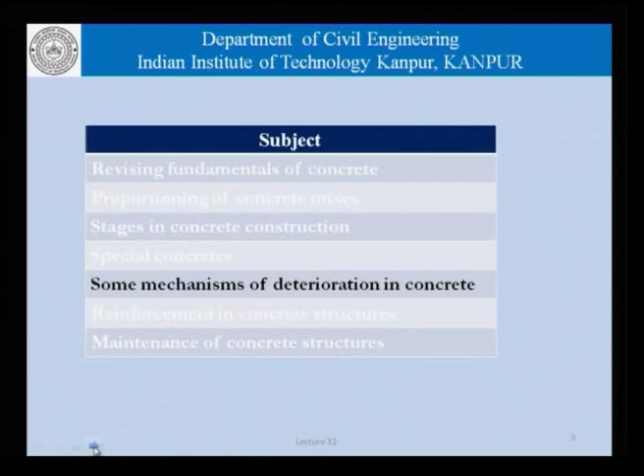Namaskar and welcome to another lecture in our module of Concrete Engineering and Technology, where we are talking about different aspects of concrete, beginning with the fundamentals, proportioning of mixes, stages in construction, special concretes, deterioration, reinforcement and maintenance. And when we talked about some of the mechanisms of deterioration in concrete, we have talked about corrosion of reinforcement and alkali aggregate reaction, including a brief treatment of the mechanisms involved, preventive methods, implications and so on and so forth.

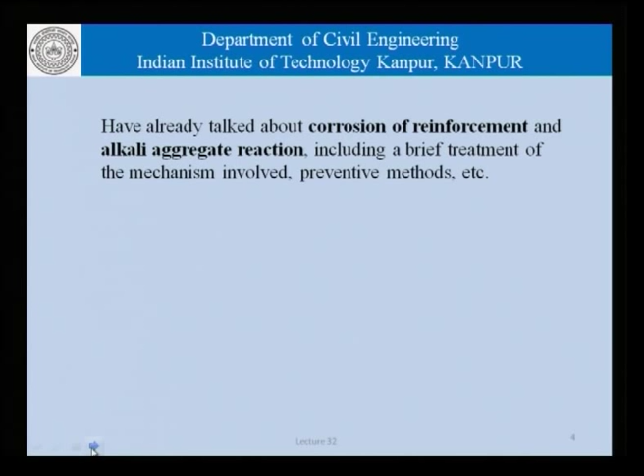In our discussion today, we will be talking about two other mechanisms, carbonation and the deterioration of concrete on account of cyclic freezing and thawing. We had mentioned carbonation in passing when we were talking about reinforcement corrosion in reinforced concrete structures. Following the discussion on carbonation and freezing and thawing, we will also talk a little bit about the concept of durability design, and that is something which is listed here as futuristic.

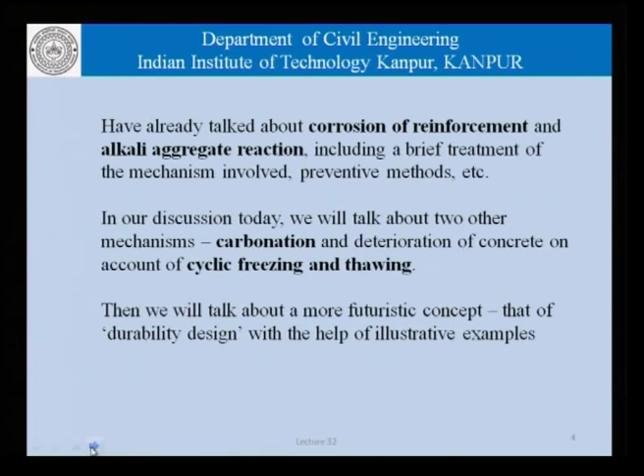Basically, it means that we do not do that kind of durability design in our structural design, or durability design in that sense is not a part of the normal design process that we go through when we design structures today. So, this is something which we would possibly live to see in the future, and that is something which we will talk about at the end with the help of illustrative examples. Now, beginning our discussion today with the carbonation of concrete.

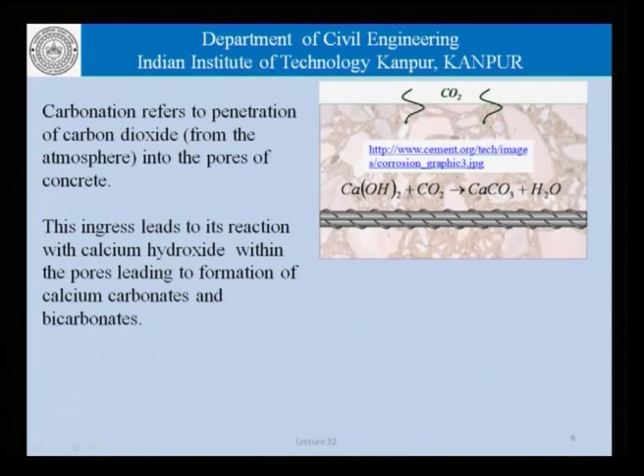Basically, concrete structures exposed to the atmosphere are exposed to a certain amount of carbon dioxide, and this carbon dioxide can penetrate into concrete through the pores which are there in concrete. And these pores and pore spaces, the kind of volume of pores, all those ideas have been talked about earlier. And we know that on account of hydration, a lot of calcium hydroxide is available in the pore spaces. Now, as far as carbonation is concerned, all concrete structures in the atmosphere are exposed to a certain amount of carbon dioxide which is present in the atmosphere. This carbon dioxide can obviously permeate into the concrete through the pore spaces which are there on account of the normal porosity, the genesis of which is arising out of movement of water which is left behind after hydration and so on.

So, carbonation basically refers to the penetration of carbon dioxide from the atmosphere into the pores of concrete, and this ingress leads to its reaction, that is the reaction of carbon dioxide with the calcium hydroxide within the pores, leading to formation of calcium carbonates and bicarbonates. So, we know that there is a lot of calcium hydroxide sitting in the pore spaces as a result of the hydration reactions. We know that all the silicates in cement, when they hydrate, give rise to calcium hydroxide, and this calcium hydroxide is the reason for having a very high pH of pore solution within concrete. Now, the penetration of carbon dioxide from the atmosphere into the concrete leads to this reaction here, which shows calcium carbonates are formed, and if this continues, we also get calcium bicarbonates being formed. So, basically carbonation is the process by which calcium hydroxide within the pore solution is converted to calcium carbonates and bicarbonates as a result of the reaction of calcium hydroxide with the carbon dioxide.

So, in principle, what happens as a result of the carbon dioxide ingress is the consumption of calcium hydroxide and the consequent reduction in pH of the pore solution. So, this calcium hydroxide is responsible for the very high pH, which is in excess of about say 12 or 13 in the pore solution. Now, naturally, if calcium hydroxide gets consumed and converted into calcium carbonates or bicarbonates, the pH of the pore solution will go down. So, this reduction in the pH has its own implications as far as the durability is concerned, as we shall see shortly. And we have the second part of it, which is deposition of calcium carbonate in the pores. So, this deposition of calcium carbonate in the pores has its own implications in terms of the properties of the concrete.

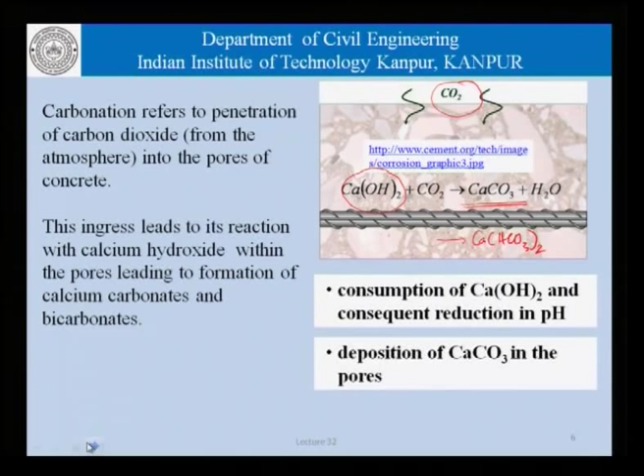Now, once we have that, here is a representation of what really goes on as a result of the carbonation in concrete. So, we have a zone here which is the closest to the atmosphere. So, here is the atmosphere. We have this region here which is the cover concrete, and we have this steel bar here. Now, as carbon dioxide penetrates into the concrete and reacts with the calcium hydroxide within, we can imagine or think that there is this region here where, let us say, a large amount of calcium hydroxide has been converted to calcium carbonates.

So, in this portion here, we can say that we have very little calcium hydroxide left, and we have a reasonably large reduction in the pH. In contrast, we have a region here which is still largely unaffected by the penetration of carbon dioxide from the atmosphere, and we have a lot of calcium hydroxide still sitting here, and the pH is still in excess of, let us say, 12 or 13 or whatever it is.

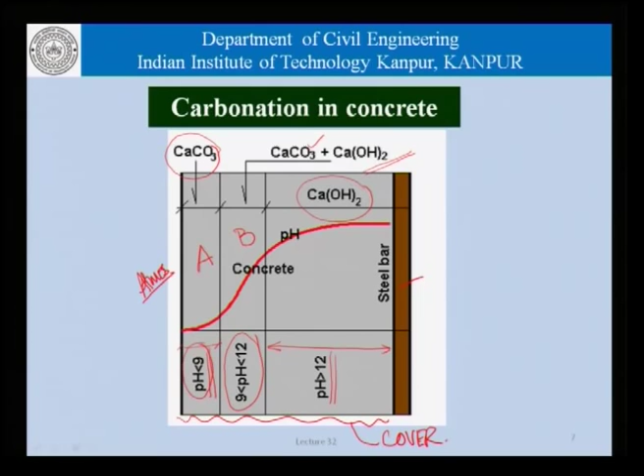So, we are trying to divide the cover concrete into a zone A, B and C, where zone A is a zone where most of the calcium hydroxide has been consumed and a lot of calcium carbonate has been deposited. Zone C is largely unaffected, and therefore, there is practically no calcium carbonate there, it is all calcium hydroxide, and zone B is still in the transition where some calcium carbonate is there and there is still some calcium hydroxide. So, with this model understanding, let us try to see how the carbonation is measured in concrete.

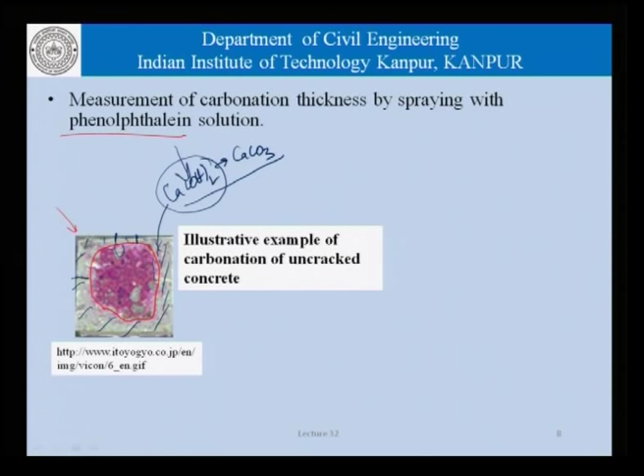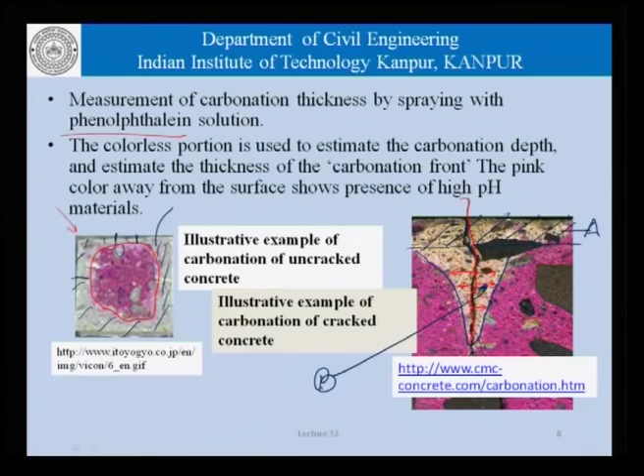This here is an example of carbonation as will occur in cracked concrete. What is being seen here is that in addition to the carbonation which has taken place in this part, which is let us say A, which is similar to this kind of an area where carbon dioxide has generally penetrated into the cover concrete. In addition to this, carbonation has also spread in this portion, let us say call it B, because carbon dioxide has gone through this crack and spread into concrete through the crack, causing the calcium hydroxide in the neighborhood of cracks also to be consumed.

And in such cases, of course, a definition of carbonation depth becomes a lot more complicated. But to deal with these complications is part of our engineering exercise, and once we understand the processes, then it is only a matter of making the right kind of approximations, the right kind of models, and making engineering decisions.

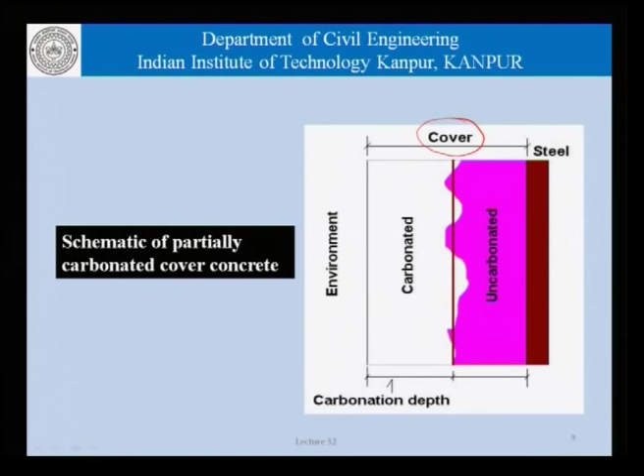In this case, we are only saying that let us not talk about the partially carbonated depth, let us talk in terms of a carbonated zone and an uncarbonated zone. The carbonated zone would appear to be white if we are testing it with a phenolphthalein kind of a spray, and the uncarbonated zone will be pink.

Now, this front here has been purposely shown to be not necessarily straight, and that is what we will see in actual practice most of the time if we carry out any phenolphthalein spray from a core or any structure that we visit. This depth here, how we define this depth is a different matter, whether we take it to be the maximum here, the minimum here, or some kind of an average, whatever it is.

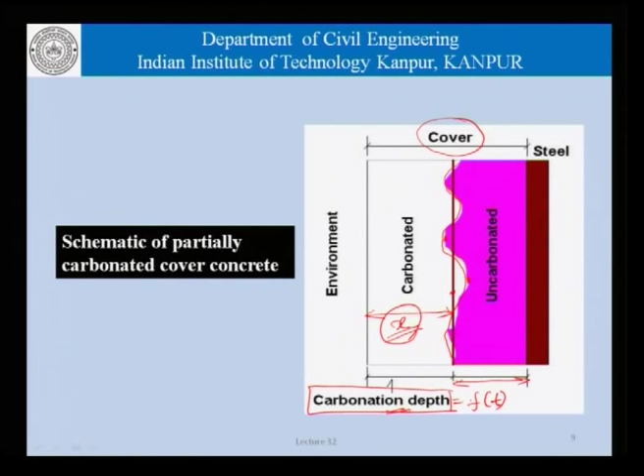Now, this irregular nature of the carbonation front notwithstanding, if we were to draw a straight line as is shown here, then this depth, if it has a value of x, notwithstanding how we measure the x, whether we take it to be the maximum value or the minimum value or the average value, whatever we do, this x is sometimes called the carbonation depth. And naturally, this carbonation depth is a function of time. As more and more time goes by, the carbonation depth increases, and that is something which we need to keep at the back of our mind when we are talking about carbonation in concrete.

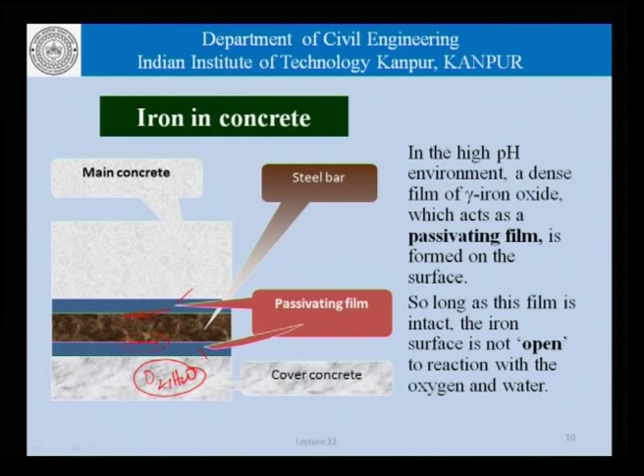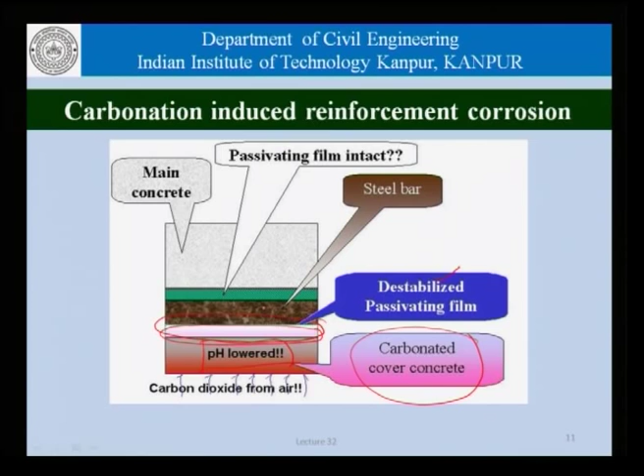So, as far as a carbonated concrete is concerned, what really happens is that once the concrete becomes carbonated as shown here, the pH in the cover concrete is lowered, and therefore, the passivating film in this part is destabilized, and therefore, it is as good as not existing, and that renders this surface of the reinforcement susceptible to corrosion.

So, as far as addressing the problem of carbonation in reinforced concrete structures from the point of view of durability and reinforcement corrosion, it can be said that carbonation leads to corrosion by the form that, on account of the penetration of carbon dioxide into the concrete, the calcium hydroxide is consumed. This lowers the pH, and if the pH falls below, let us say 9 or 10, the passivating film that is stable otherwise becomes thermodynamically unstable, and that means that the surface of the reinforcement becomes vulnerable to corrosion on account of the presence of oxygen and water in the cover concrete.

So, the presence of oxygen and water in cover concrete is never in question. It is only that the presence of the passivating film that prevents a physical contact between the reinforcing surface and the oxygen and water, that prevents corrosion in normal concrete, but once that film is destabilized, the surface is vulnerable to attack.

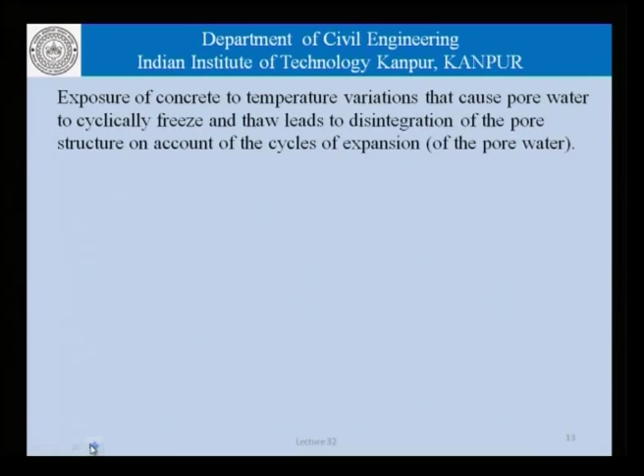So, with this overview of the carbonation process and its ensuing implication in terms of reinforcement corrosion, let us briefly talk about cyclic freezing and thawing in concrete. Now, exposure of concrete to temperature variations that cause pore water to cyclically freeze and thaw leads to disintegration of the pore structure on account of the cycles of expansion of pore water. We know that when the water freezes at 0 degrees centigrade, it expands, and therefore, if the concrete is saturated with water and the temperature of the atmosphere becomes such that the pore water freezes, it will obviously cause some kind of expansive stresses in the surrounding pore structure.

And if this happens cyclically, that is, the water freezes and then as the temperature in the atmosphere rises over a period of time, it thaws and freezes once again, and that is what is cyclic freezing and thawing. If that happens repeatedly over a period of time, then the pore structure actually disintegrates, and this disintegration of the pore structure is what we are talking about when we are talking about the problem of freezing and thawing in concrete.

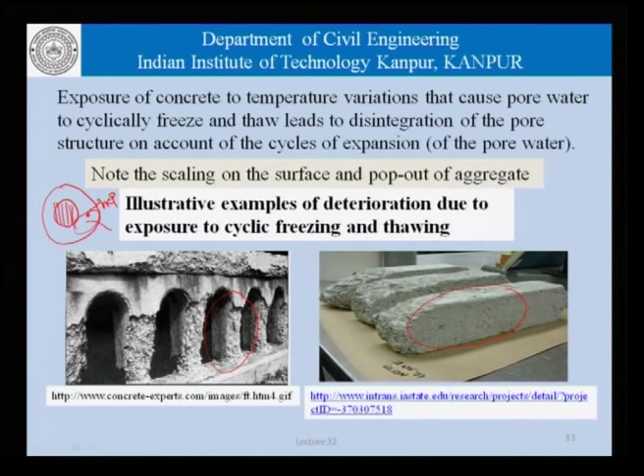What really happens is that if we have an aggregate sitting inside hardened cement paste, on account of cyclic freezing and thawing, it is the pore structure of HCP that disintegrates. The aggregate itself is not so vulnerable, even though it has its own porosity, but it is the HCP which is more vulnerable. Now, on account of repeated cycles of freezing and thawing, the HCP disintegrates. If the HCP around the aggregate disintegrates and gets removed, then the aggregates become unlocked from their matrix and we have a pop out of aggregates.

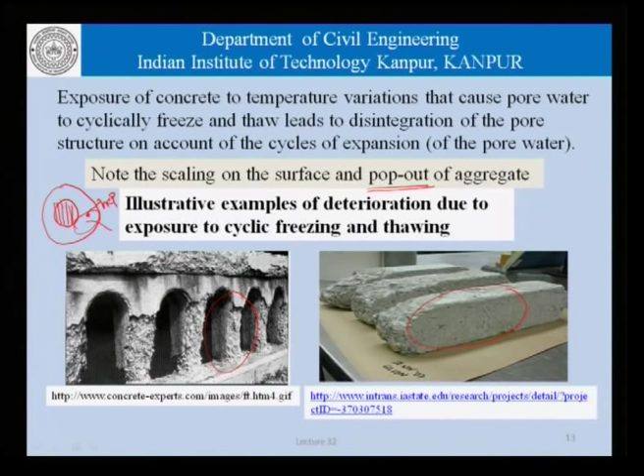So one of the things that happens as far as freezing and thawing of concrete is concerned is scaling, pop out, and a general disintegration of the surface layers.

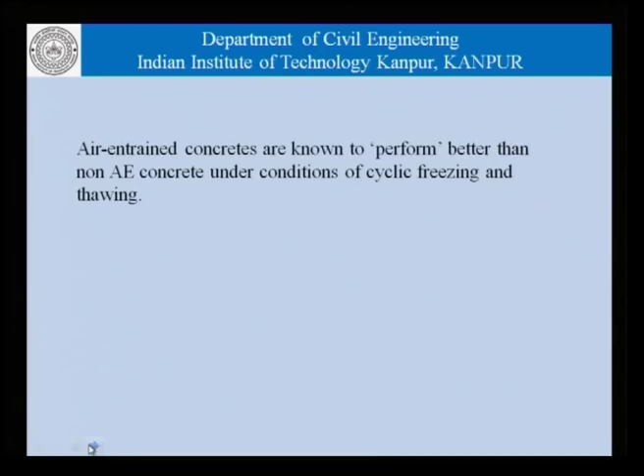Now, air entrained concretes are known to perform better than non-air entrained concretes under conditions of cyclic freezing and thawing, and this is something we have talked about before when discussing proportioning of concrete mixes and durability.

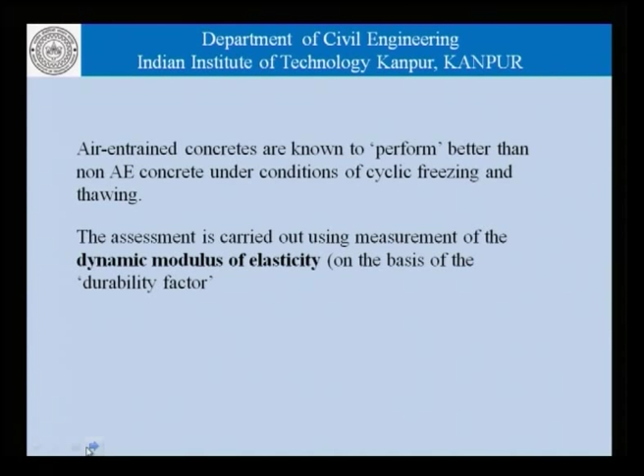The assessment in terms of whether a concrete is durable or not is carried out based on the measurement of the dynamic modulus of elasticity, on the basis of a durability factor. Now, what these terms are, we will probably see presently.

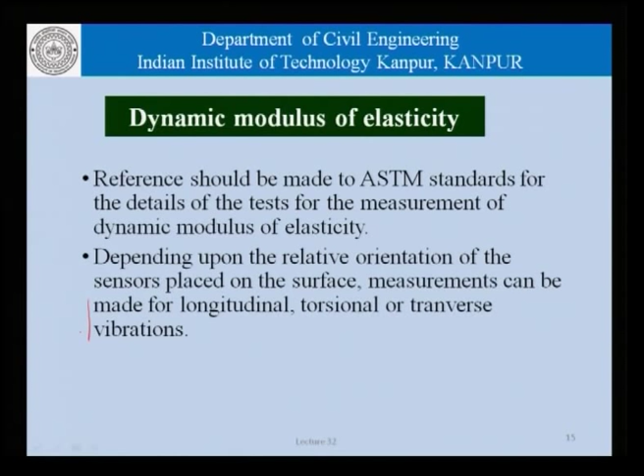As far as the dynamic modulus of elasticity is concerned, I would say that you should read appropriate ASTM standards for the details of the test. Depending on the relative orientation of sensors placed on the surface, measurements can be made for longitudinal, torsional, or transverse vibrations. This will become clear once we see how the measurements are done. But before that, let us see how the test is actually carried out.

Once we have the temperature cycle, which is also defined as per the standard, we know the maximum temperature, the minimum temperature, and the durations of the cycles. Therefore we can define how many number of cycles of temperature variation we are carrying out. So by exposing these concrete specimens to this regime of varying temperatures, we try to subject them to deterioration.

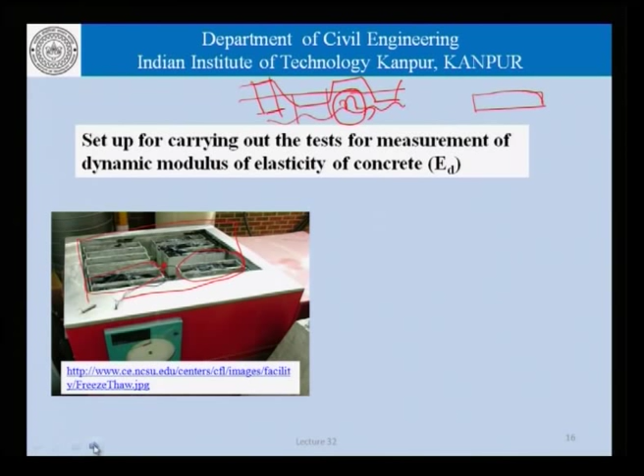While the test is being done, at different points in time we try to estimate the modulus of elasticity using a setup which is something like this. This setup basically consists of a vibration generating unit and a vibration sensing unit.

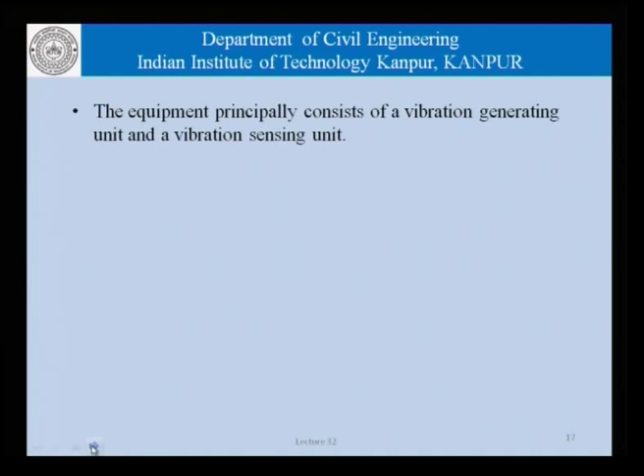The generating unit is essentially an electronic audio frequency oscillator, which generates electrical audio frequency voltages suitably modified to produce mechanical vibrations in the concrete specimen. On the sensing side, to sense these vibrations, is a piezoelectric transducer, which converts the mechanical vibrations into electrical AC voltages of the same frequency.

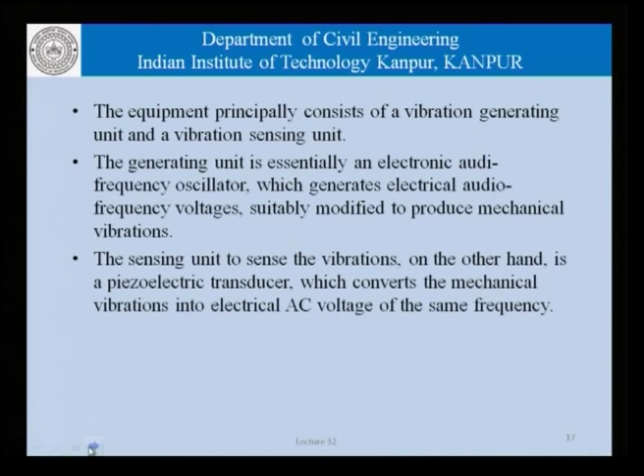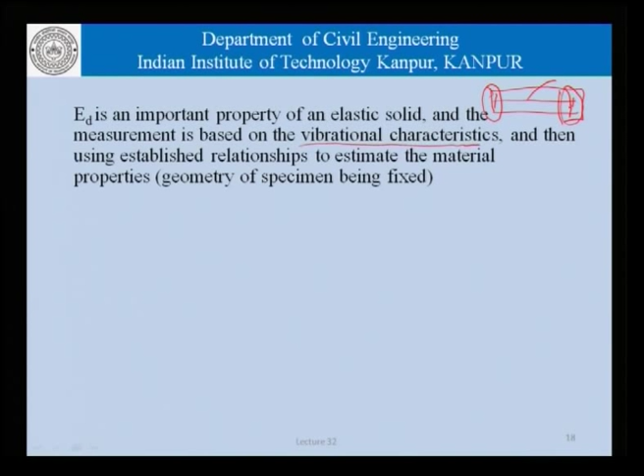So having carried out this exercise, we try to estimate E d, which is the dynamic modulus of elasticity, on the basis of the vibrational characteristics. We have a specimen here, a generating unit here, and a sensing unit here, and based on whatever we measure in the sensing unit, we get an idea of the vibrational characteristics of this specimen.

Based on these vibrational characteristics, the natural frequency and so on, we can use established relationships to estimate the material property, which is E in our case, knowing the geometric properties of the specimen. Usually, the vibrational properties are a function of the geometry and the material properties. So here we are trying to estimate the material properties by measuring the vibrational properties and having prior knowledge of the geometry of the specimen.

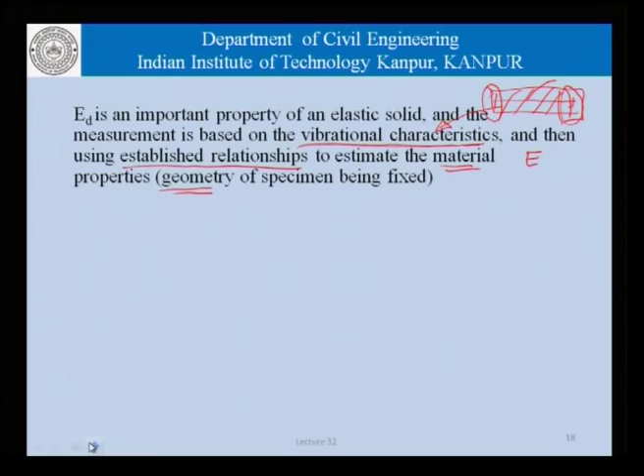And from those material properties, we are able to assess the health or the performance or the characteristics of the concrete. The test is frequently used to assess the durability factor, which is the ratio of the E d, that is the dynamic modulus of elasticity, at any point compared to the initial value. So, it is not really only the absolute value of E d that we are talking about, but the change in the dynamic modulus of elasticity of that particular specimen as it occurs over a period

of time. And to that extent, the method is a truly non-destructive test, as the same specimen is used to monitor the changes in the modulus of elasticity, the dynamic modulus of elasticity E d, eliminating any issues relating to the interpretation of results obtained using different specimens, although they may be cast at the same point in time.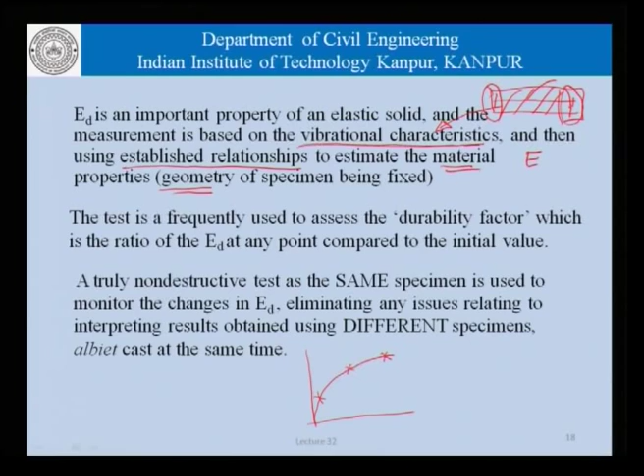If I were to explain that once again, we know that concrete develops strength over a period of time. We know that the strength of concrete is so much here, and so much here. How do we get this information? We get this information by testing cubes or cylinders which are cast at the same time, but tested here. Some other cylinders are tested here, some other cylinders are tested here. We assume that the concrete is the same, and therefore, whether we are using different specimens or the same specimen, it really does not matter.

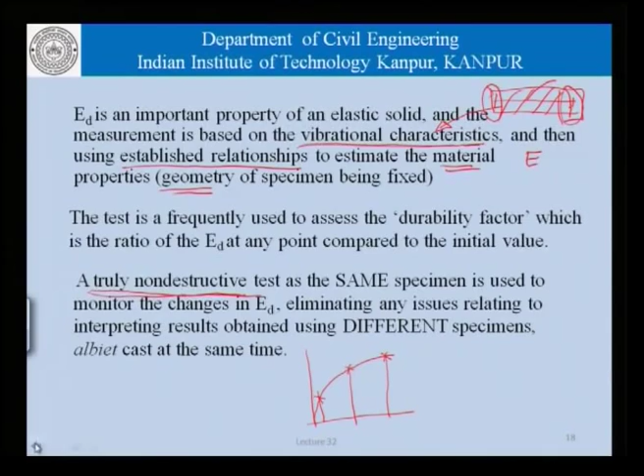In fact, as far as strength testing is concerned, we cannot really use the same specimen, because the test is destructive in nature. In this case here, the test is truly non-destructive. That is the same specimen. If we go back to this setup here, the underlying assumption is that testing the concrete using this kind of a vibrational method does not alter the specimen at all, and therefore, the same specimen continues to be exposed for further cycles in this chamber, and the same specimen can be used at different points in time to see or monitor the changes that occur in the dynamic modulus of elasticity. And that is a very big advantage when using this method, because we are really using the same specimen.

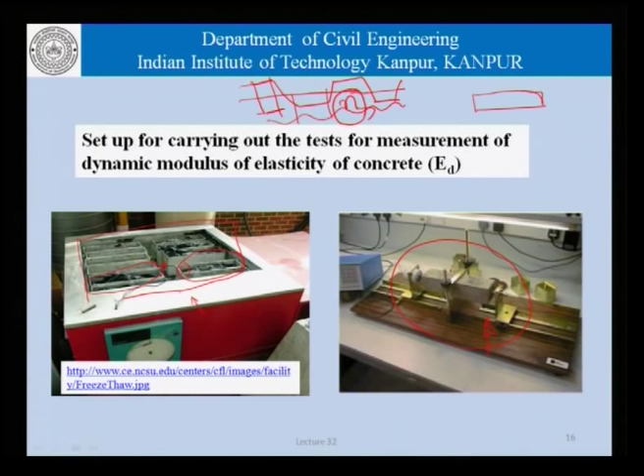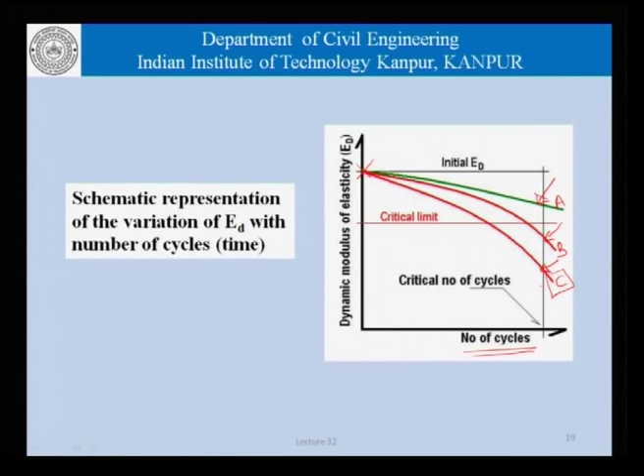It is one of the reasons because of which we also work with the relative values rather than the absolute values. Now, this picture here shows a schematic representation of the variation of the modulus of elasticity with the number of cycles, which is actually related to time. So, we have an initial value of the dynamic modulus of elasticity, and as the number of cycles of exposure increases, that is with the passage of time, different concretes could show different patterns of change in the E d value. So, if we have these three concretes, let us say A, B and C, we can see that the concrete A shows the minimum change in the dynamic modulus of elasticity, and this concrete C is not performing well. Now, this is the first pass or a basic discussion on freezing and thawing and how the performance of concrete under cyclic freezing and thawing can be assessed or monitored.

Now, let us come to the second part of our discussion today, which is durability design. Now, design exercise carried out with a view to ensure that the material remains acceptable over the service life. That is the essence of durability design. So, deliberately I have used the word material and not structure, because what we are talking about here is that the material properties should still be acceptable. There are situations where we need to talk about the structure itself, and that also we will see in subsequent examples.

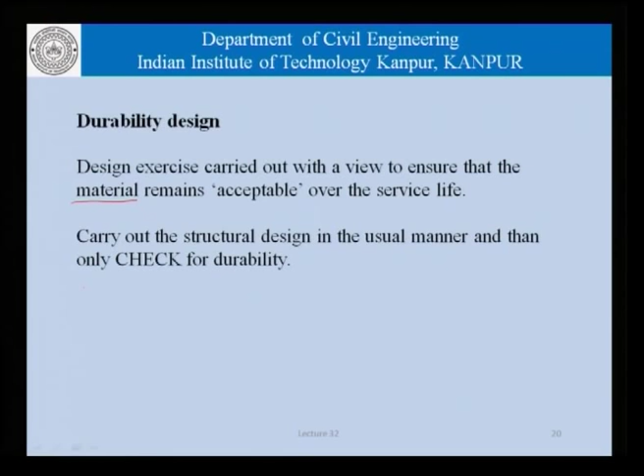It involves carrying out the structural design in the usual manner and then check for durability. It is not necessarily a full-fledged design carried out based on durability considerations, but at least a check on whether a design carried out in an established manner using principles which are known from the structural point of view, how does it perform in terms of the durability of the material. Usually in our structural design procedures, we do not consider the changes in the material properties over time in terms of strength, in terms of its modulus of elasticity and so on. It is only very rarely that we account for the changes in the properties over a period of time. But with the present level of understanding, it is only natural that that concept will come in, that we should check whether or not the material will survive to a level which is still acceptable at the end of the service life.

We should remember that the structural response depends on the material properties and the geometry, whether we are talking in terms of deflections or strains or deformations or cracking. All this is related to not only the load that is applied, but also the material properties of the material that we are using and the geometry of the member, whether it is a beam or a column or a slab or whatever.

As far as most concrete structures are concerned, the geometry does not change with time. It is difficult to envisage a situation where the beam or the column will grow or shrink in size. It is mostly the material properties that will change. In any case, as far as durability design is concerned, or being able to check durability, we need to have relations in terms of geometry and material properties with time. And this is the essence of durability design. That is, what kind of models that we use to relate the properties of the material with time.

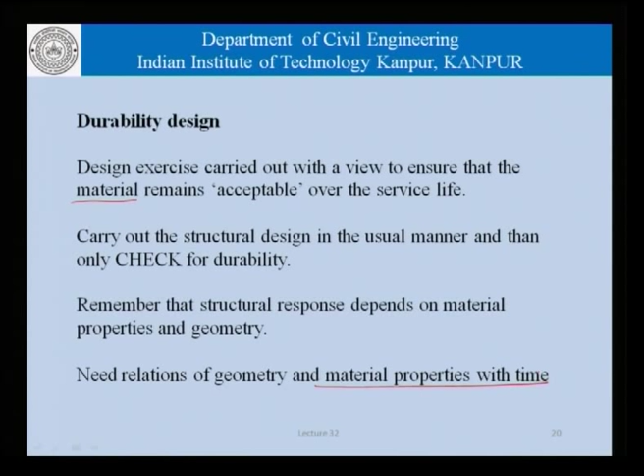Let us talk in terms of an example which is easier to understand. Let us consider the example of durability in freezing and thawing environment, in cyclic freezing and thawing that we just did a few minutes ago. We had talked of this kind of a variation in the dynamic modulus of elasticity of concrete. We said that the concrete has an initial value of E d, and if that concrete is tested using a certain standard, then the dynamic modulus of elasticity will reduce, and the performance of that concrete would depend on the properties of the material and so on.

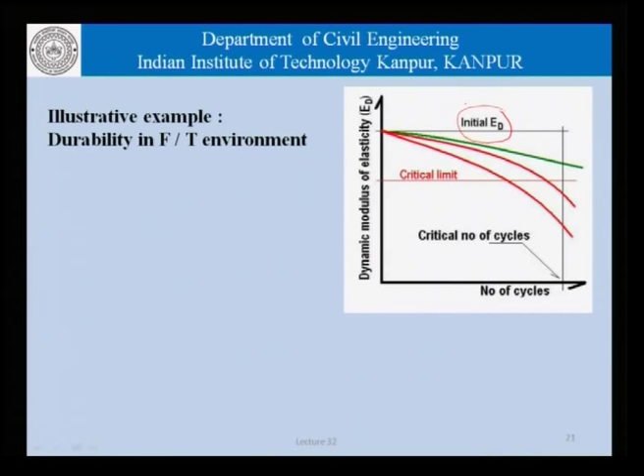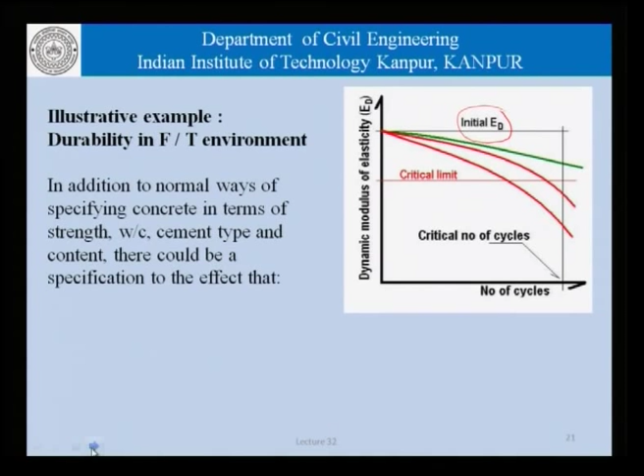So, as far as durability design is concerned, in addition to the normal ways of specifying concrete in terms of strength, water cement ratio, cement type and content, there could be a specification to the effect that concrete used shall be such that when tested in accordance with any given method, the reduction in E d shall not be more than a certain percentage at the end of a certain number of cycles. Now, this is the kind of specification which is performance based, taking into account the environment in which the concrete has been exposed. So, it is not only a specification of the concrete in terms of the strength, that if a concrete is subjected to cyclic freezing and thawing, use air entrained concrete of 5%, use an air entraining agent which has a certain property, use a certain type of cement and so on. But we basically say that no matter what you do, at the end of it, when tested in a certain manner, the extent of reduction in the dynamic modulus of elasticity should not exceed a certain number. So, basically we lay down this critical limit and this number of cycles.

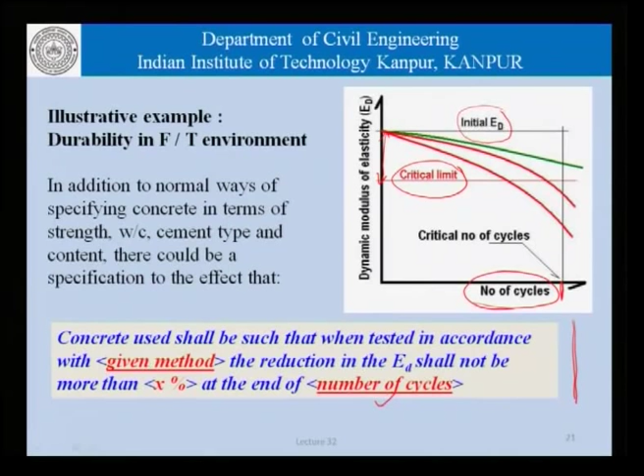Now, once the method of testing is fixed, the parameters such as the number of cycles and the extent of reduction acceptable can be varied in specification from structure to structure depending upon its importance and location and so on and so forth. So, it is not necessary to have the same level of performance or to ask for the same level of performance in all concrete structures. The expected level of performance could be different depending on the importance, the impact of that structure and so on and so forth.

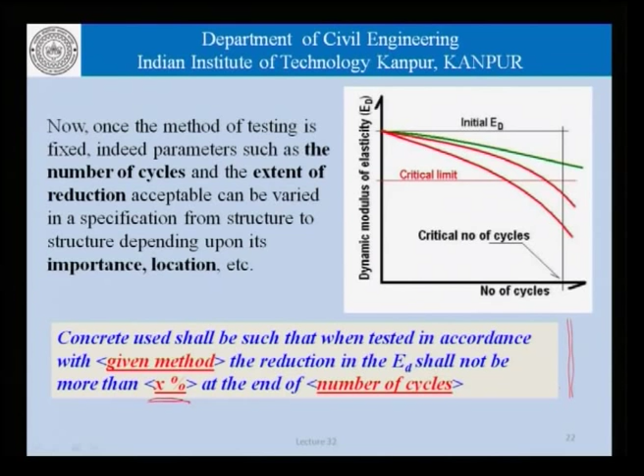And therefore, in certain cases we may accept, let us say 20% reduction in E d in 100 cycles, but in certain cases we may just accept 10%. In certain cases maybe we will accept up to 30%. So, depending on what kind of a structural design we do, what is the importance of the structure that we are trying to design, this is the kind of performance requirement that we can lay down when specifying a concrete. So, we carry out the design of the structure in the usual manner and then see that the concrete that we are going to use also meets this

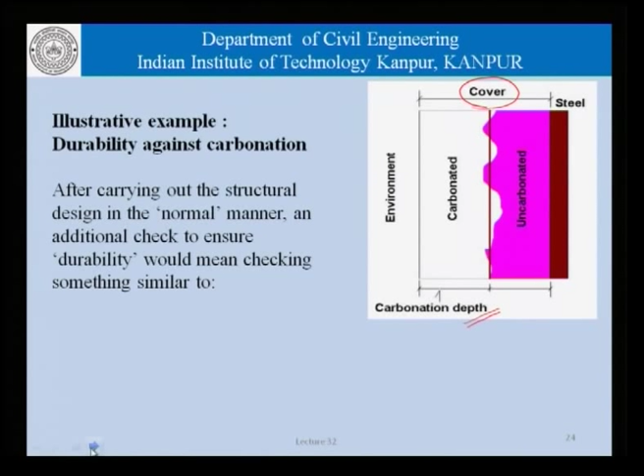performance criteria. Now, let us take another illustrative example, that of durability against carbonation. Again, carbonation is something which we just completed, and we have seen how we are going to handle the situation in terms of defining a carbonation depth and relating it to the cover concrete. In this case, after carrying out the structural design in the normal or the usual manner, an additional check to ensure durability would mean checking something similar to: cover provided C, which is this value here, shall be such that it exceeds the expected depth of carbonation, which is d here, at the end of the service life of the structure by x millimeters, and this is the value x. So, we are saying that C should be greater than or equal to d plus x.

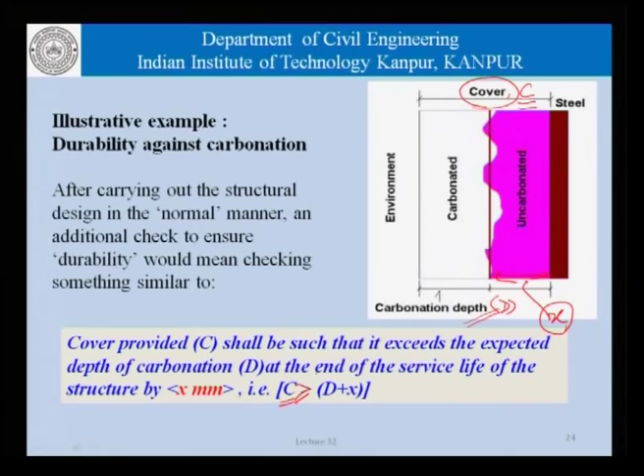In this case, I am sure you can notice that we are not talking in terms of only the material. We are talking of a composite action of the structure. That is, for the concrete, we are trying to say how much is the design carbonation depth over the service life of the structure, and saying that the cover provided should be such that it is greater than the likely depth of carbonation by a certain amount.

Of course, in this case we need to know the rate at which the carbonation front moves into the concrete. We need to know how this depth changes with the period of time, so that at the end of the service life where will it be, and that is an estimate that we are making even at the outset. And indeed, the rate of movement of the carbonation front into concrete would be related to properties of the concrete and its constituents, for example, the water cement ratio, the type and amount of cement, the conditions of exposure.

Conditions of exposure are important in terms of, for example, whether the concrete is indoor or outdoor, because if it is indoor it is not subjected to rain, if it is outdoor it is subjected to rain. Rain tends to make the concrete wet, and in wet concrete carbonation progresses at a different rate than it progresses in the dry concrete. So, all these factors have to be borne in mind when we are talking in terms of how quickly or how slowly will the carbonation front move into the concrete through the cover concrete.

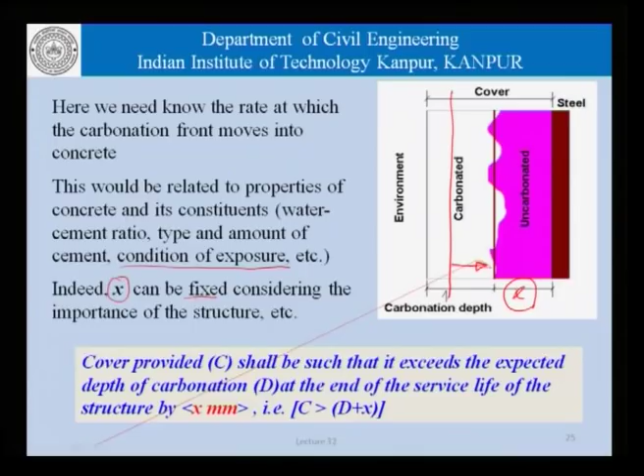And as far as the x is concerned, that is this additional depth, that is the additional uncarbonated concrete, this can be fixed considering the importance of the structure and other considerations. So, in a very important structure we may say that well x should be at least 15 millimeters, in other structures we may say 5 millimeters is acceptable, and so on. The principal thing is that if we keep on increasing the x, what we are really doing is prescribing higher and higher cover values, and that has its own implication in terms of the self weight of the structure, the economics, and so on.

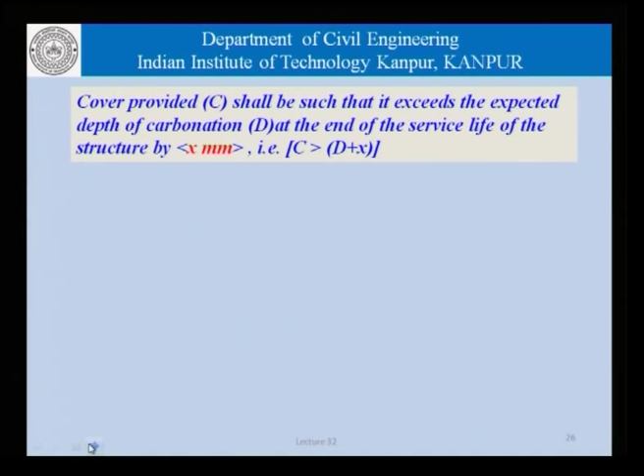Now, let us examine this provision that we wrote, provide a cover depth C such that it exceeds the expected depth of carbonation D at the end of service life of the structure by x millimeters, a little more. The underlying assumption in this statement is one, if the carbonation front reaches the location of the reinforcement, the latter is rendered susceptible to corrosion. That is, if this x becomes 0, that is the entire concrete up to the reinforcement location is carbonated, then this steel is rendered vulnerable to corrosion. Now, this is the first thing that we have assumed when we are making a statement of this nature.

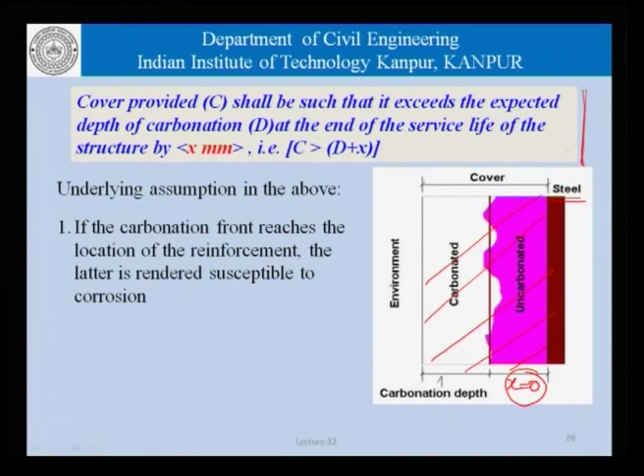In addition to that, what we are saying is that the reinforcement cannot be rendered susceptible to corrosion during the service life of the structure. So, the service life of the structure is supposed to be only till such point as the reinforcement is rendered susceptible to corrosion. Now, whether or not corrosion actually occurs is not something which we are talking about. There can be obviously situations where even if carbonation occurs, the rates of corrosion may be too low, they may be acceptable, but that part of service life is not being considered here. So, to that extent this thought process is fairly conservative.

In fact, if we look at models which talk in terms of service life of reinforced concrete structures and reinforcement corrosion, very often we see a model which is something like this, which says that this is the life during which no corrosion takes place, and beyond this point the corrosion is initiated here and reaches a point here which leads to formation of cracks. We have talked about this when we were talking in terms of the corrosion process within concrete and the deposition of corrosion products on the reinforcing bars and so on. In this discussion here, we are simply ignoring this part. We are saying that, well, our service life is confined to only the portion where the reinforcement is rendered susceptible to corrosion. Whether or not corrosion occurs, what is the rate at which the corrosion will occur, those are some things which we are not talking about.

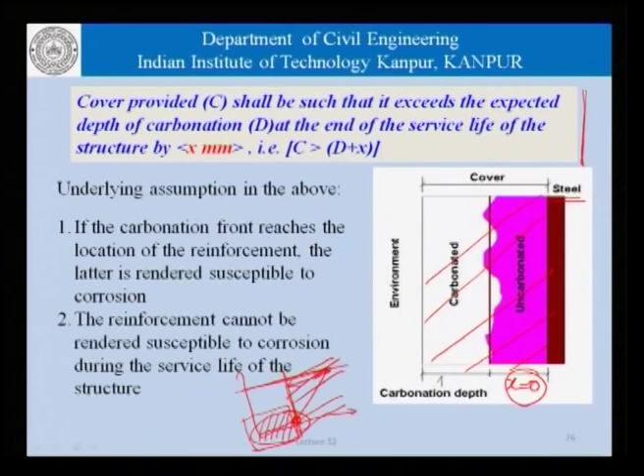Now, continuing our discussion with carbonation, in this case we could in fact use the measurement of the carbonation depth at different points in time as a part of the normal inspection procedure. If we are inspecting a structure, and we normally do that, at least in the case of more important structures, there is a protocol where the structure is normally inspected periodically.

Then as part of the inspection protocol, we could measure the depth of carbonation that has occurred at that point in time. What that will do is to help us make a mid course correction in cases when the estimated and actual depths of carbonation are different, and also obtain more realistic estimates of the rates of carbonation.

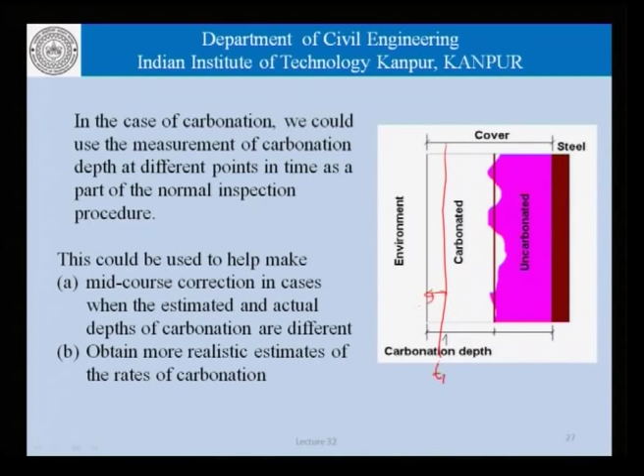So, what we are saying is that if we measure the rate of carbonation at some point here at time t equal to T1 and find that this is the depth of carbonation that we actually find, this should be compared with the x1 estimated, that is, at this point T1 what was the estimated value of x1. And if we compare this x1 estimate versus x1 actual, then we will know whether we made a conservative or a non-conservative estimate in terms of the propagation of carbonation.

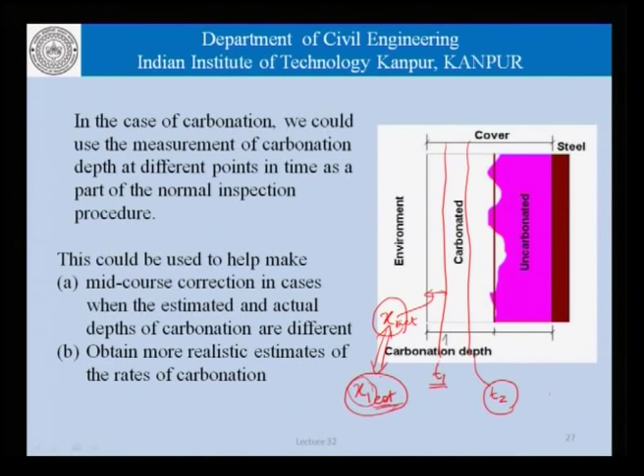Similarly, we can make a correction and then measure this carbonation depth at T2 and see. We can measure the carbonation depth at T2 and so on and so forth. So, with this we come to a close of the discussion on carbonation and durability related issues from the point of view of durability design. And before we close, let us go through a few questions.

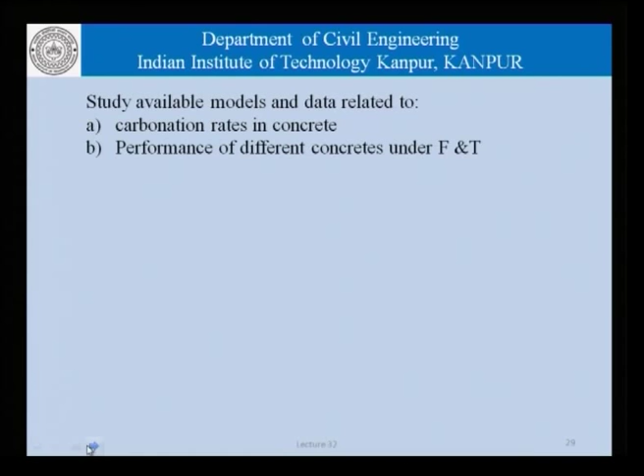What you could do is to study available models and data which relate to carbonation rates in different concretes. In particular, I would like to draw your attention to the famous Kishitani equation, which I am sure you can find in literature. Performance of different concretes under freezing and thawing. We made a statement that air entrained concretes perform better. That is something which you can always verify from the observations made in different researches as to how much is the air content which is required, because air content also has the implication in terms of strengths.

I would like you to answer the question, how is the dynamic modulus of elasticity different from the normal modulus of elasticity of concrete? We have so many equations which relate, for example, the characteristic strength of concrete or the strength of concrete. We have the stress strain curve of concrete, and from that we can estimate different moduli of elasticity of concrete. And what is this dynamic modulus of elasticity, and how is it different from these different modulus of elasticity of concrete that can be defined?

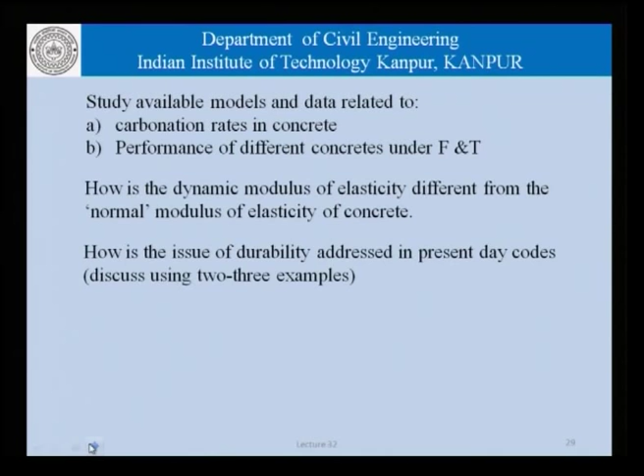I would also like you to take a look as to how the durability related issues are addressed in present day codes. You can discuss 2 or 3 examples in terms of the different exposure conditions, whether it is chloride penetration or chloride induced corrosion or carbonation or freezing and thawing. You could use different codal provisions, maybe the American ACI provisions or the New Zealand provisions, the Indian provisions, the European provisions, and try to compare how concretes have been specified, because at the end of it durability has been of concern to engineers for a long period of time, and certain specifications in codes do address the problem, except that the prescription is simply a

number. That is, in this case do this, in this case use at least M30 concrete, in this case do not have a water cement ratio more than 35% or 40%, use a minimum cement content of 350 kgs per cubic meter. They are not related to the performance of the concrete. If we use that, then what really happens, or what will actually happen in a given situation. So, that is what is slightly different in the concept of durability design that we talked about just now.

And carrying on from there, we did the formulation, let us say, in a very simple manner, but we did it nonetheless for freezing and thawing and carbonation related deterioration. I would like you to formulate the durability design guideline for structures exposed to chloride rich environment, that is, structures which are susceptible or vulnerable to chloride induced reinforcement corrosion. What would be the parallels you could draw from our discussion on carbonation and its related carbonation front considerations? How would you modify those if we were dealing with chloride induced corrosion?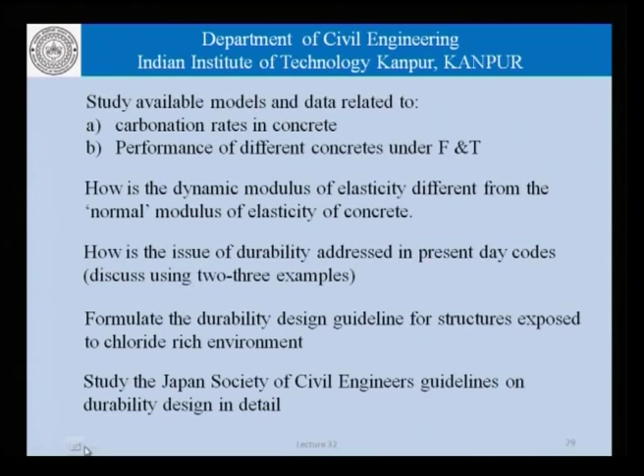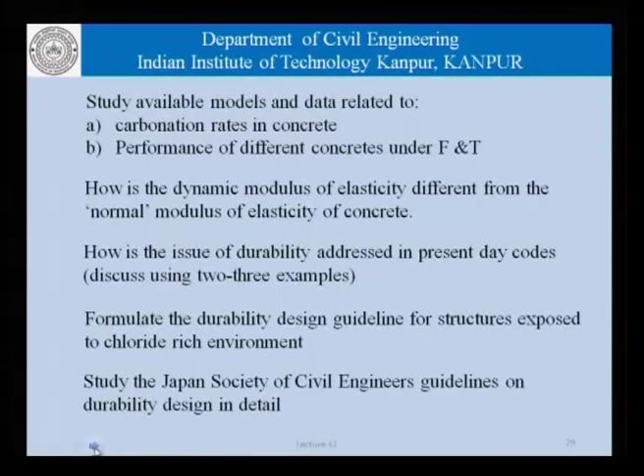And finally, I would like you to study the Japan Society of Civil Engineers guidelines on durability design in a little bit more detail and see how the provisions given therein are related to the kind of discussion that we had in this lecture, and also try to relate the concepts of porosity, diffusion, the coefficient of diffusion, and so on. And with this we come to an end of our discussion today. Thank you.